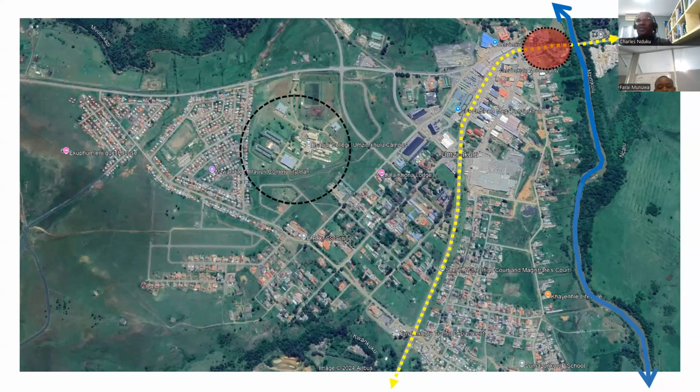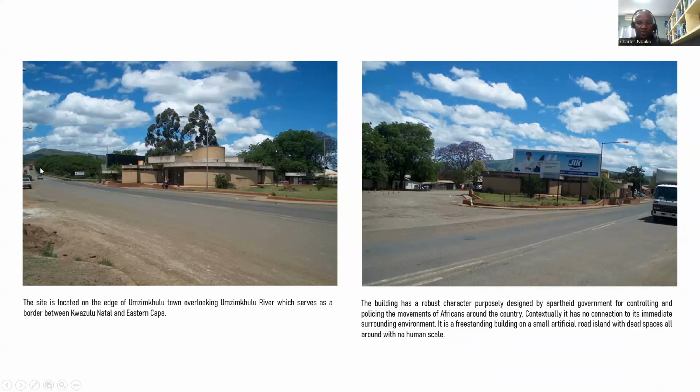As I said, this is the road, this is the building on the right, and you can see the JIK advert was just plugged in front of that building, as if somebody knew that this building doesn't have to be seen, because it used to control the movement of people from Transkei to South Africa. And that is the bridge, and you're going all the way toward the direction of Durban. So this is the site.

The red building is the existing one, and then the blue one is where the site was. It was a very narrow site, and you've got a river there, and it's only a strip of flat land, and then it steps down towards the river. It had very nice views, though the river was not the cleanest - the water was always brown, but it had a very nice view.

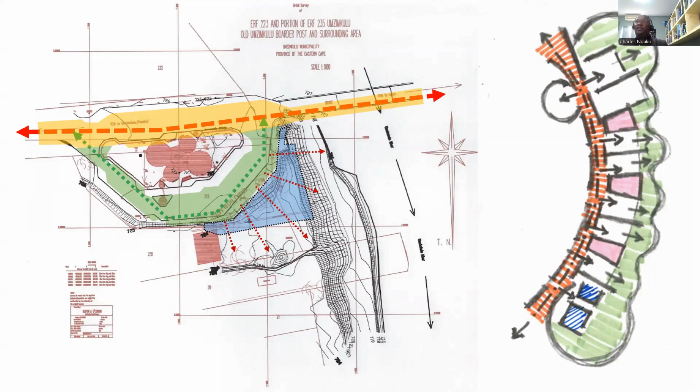They were very concerned about the communities that could be given a space like craft stalls, to do crafts themselves. So it was a popular idea to come up with buildings like that, and basically that was the building I had to produce. It was like a craft store with a restaurant, admin office, and ablutions.

So this is the building—this is the existing one, the gray one, and this is the building that I actually proposed, following the curvature of the site. My concept always follows understanding the movement of the people, so I structure everything along that movement, making it easy to create spaces on either side. At that moment, I was fascinated by curves and curvilinear buildings.

I don't know whether it was still the rural in me, but later I became less comfortable using curves, because they're very difficult to deal with. You must make sure where they meet and really know what you're doing.

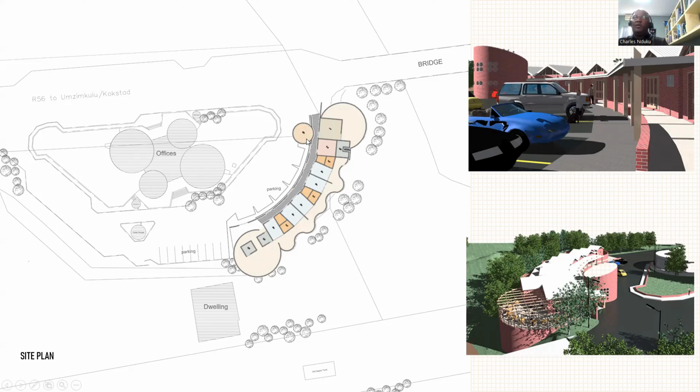The 3Ds were not much. This is one of the drawings I developed, trying to get a curve or round shape, a round building.

I had to do it manually. At that time, this was one of my first projects, so it wasn't easy trying to master the software, design and draw, because I only had Monday with me—there were only two of us.

The short elevation is this one—the front side, then the back side is the middle one, or rather the front, the middle, and the back one at the bottom.

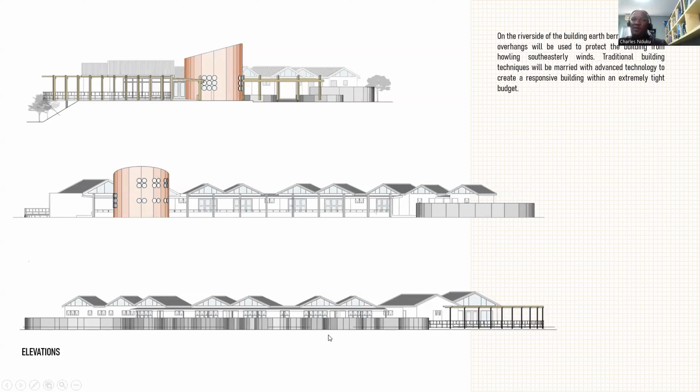So this is how the building looks. Unfortunately, with the municipality's budgeting, I was so disappointed when I had to close my clerestory windows with wooden leads. The shape and the basic idea were there—it was an open building—but I had to reduce the fenestration, the glasses, the windows, because the budget was very tight.

I think, if I'm not mistaken, it was around 3 million that we had at that time—quite a cheap building, not very expensive. And this is the old bridge.

For the deck, I actually used the old bridge there just to support it. This was supposed to be the restaurant, and when I left, Wimpy was negotiating to use that space—I don't know if Wimpy ever used it.

That's how the building looks, and I haven't seen it for a long time. That is the structure, the admin part where they stored the completed products, and that's how it looked when it was finished.

It actually blended very well with the existing buildings, because the only thing we had to do was paint—we used cementitious paint in different tones, ethnic colors. The municipality also advised whoever was advertising with that big board to remove it, so it was removed. You can see how my new building blended with the old one—as one of my first buildings, I think I didn't do that bad.

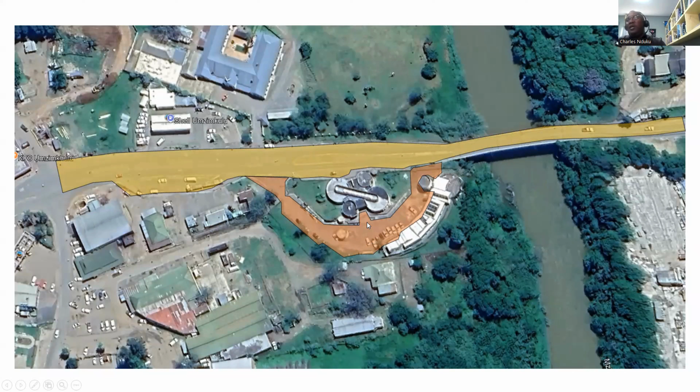It was used. You're looking at the number of cars that are parking there, so the space is eventually used now. So yeah, that is the end of my first project.

Now, coming to the Nelson Mandela Interpretative Center or Museum. The name of this building changed, I think, 3 times. So as I said, I was very fascinated.

I'm fascinated with natural light. I think natural light is actually good, it really livens the space up. I took this because I realized that a rondavel is usually dark, and if you look at the rural rondavels, they have got small windows. It's usually dark inside, but it's not that cold because of the natural materials that I used.

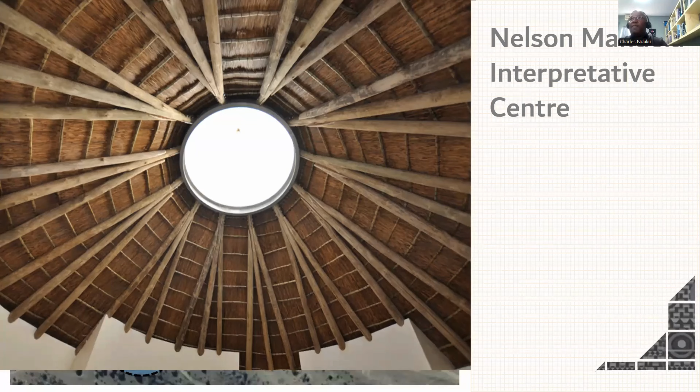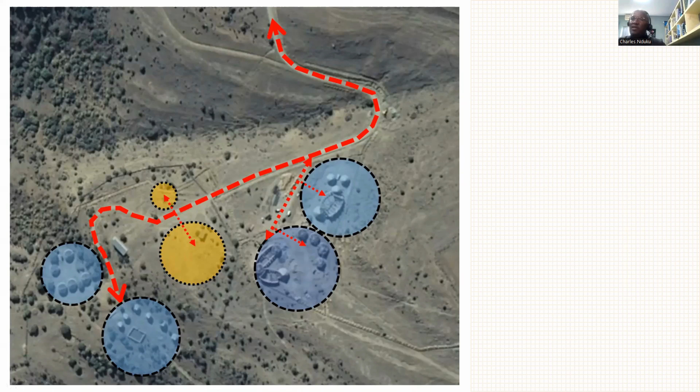And then when we got there, these 2 buildings were there already. I think they had been finished already, backpackers and a conferencing facility. I think he's building a city there, a rural town, because he also had some site development plan.

This was the site development plan there, where there's that parking, that was going to be a visitor center, and then you actually walk. Only those that could not walk would drive down to here. So this is what is existing there.

We found existing, I think it was done by DPW, a display that showed pictures of Nelson Mandela when he was still growing, or young, or a boxer. You probably have seen these pictures of him.

So we had to try and use more or less the same language. So this was the attempt. After so many attempts that I made, I thought of a first world approach.

And Mandla is one of the most difficult clients you can ever get. He said, you know what, I'm not interested in all what you're talking about, all I need is my rondavels. I need my rondavels because my homestead is made out of rondavels.

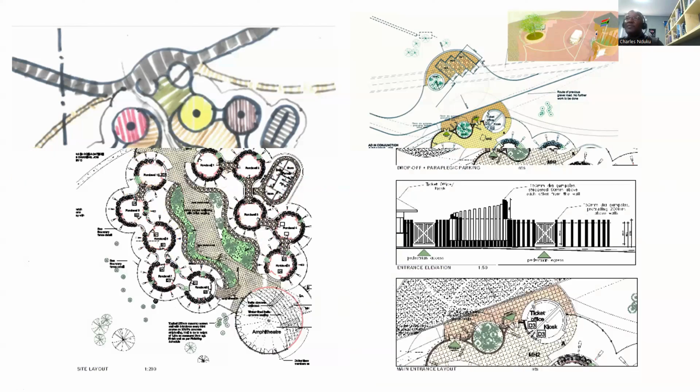So we had to have parking in front of the entrance, about 2-3 parking, so that when the tourists come, they park and then walk in. And then this was the entrance proposed.

And he envisaged this as a space where his grandfather's bust was going to be placed. He insisted that we plant these poles so that there could be creepers that will grow there, and then sort of cover or protect his bust from the weather. That was his idea.

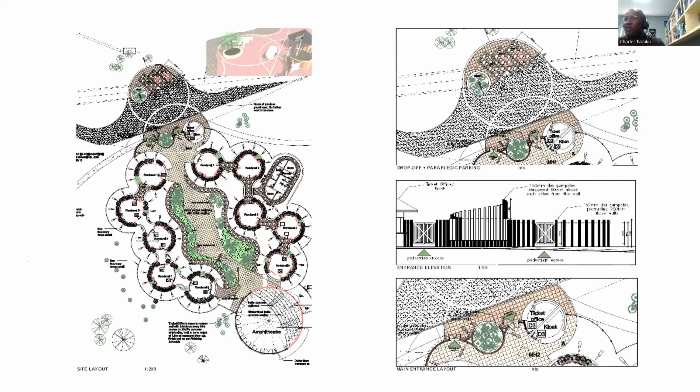Because the site was slopey, and the rondavels were up on the hill, the wind is quite heavy in rural Transkei, so we had to make sure of what we were doing. We tried to step down the building, with the main walkway and then little walkways in front of these structures on the upper side and the lower side as well.

So this is how the entrance looked like when finished. At the apex, we used polycarbonate to allow the natural light in.

At the bottom, we created a plinth. The rural rondavels, the mothers do motifs, and that part is always thicker than the other part. The upper part, to my surprise, really subscribes or fits within the classical language of a plinth and a cornice, the superstructure and all of that. I don't know whether they were aware of that in the rural areas when they were doing it. So this is how it turned out at the end of the day.

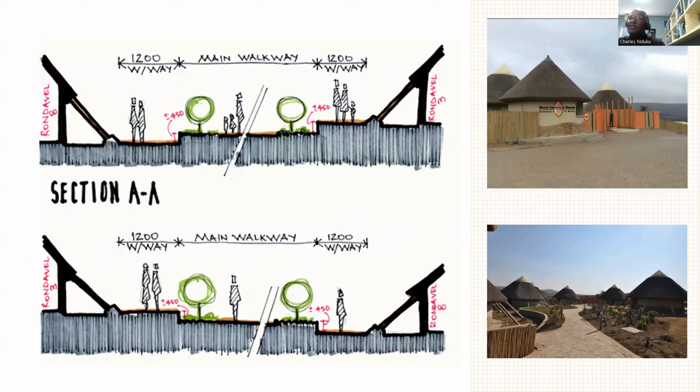It was not bad, but in the rural area we had to stick to the language that Mandla understood. So we did quite a lot of details with the polycarbonate on top to filter the natural light and create the spaces where the information is going to be stored, locked.

We thought of the channeling, the stormwater around the building, so we used no-fines concrete, so that the water that comes through falls down the thatch roof, is captured there and filtered away from the site, and some of it will actually help irrigate the greenery around.

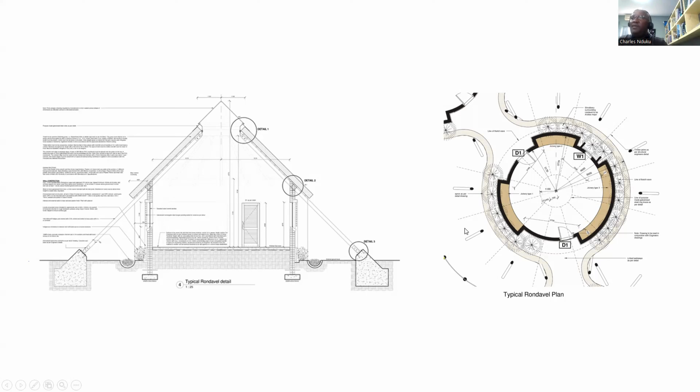It was a lot of a struggle, because we were dealing with a client who knew what he wanted. These were details for the top ring, because the weather is always a problem where you have to meet so many poles that are like 100 millimeters plus in diameter. So we created a steel ring to fix each of them before they meet at the center there.

That was an opportunity to start introducing our polycarbonate, which filtered the light very nicely. This is the amphitheater. Unfortunately, because it's such a huge structure, our engineer did not want to use poles, he used steel instead. But again, the idea of natural light is one that I always want to use.

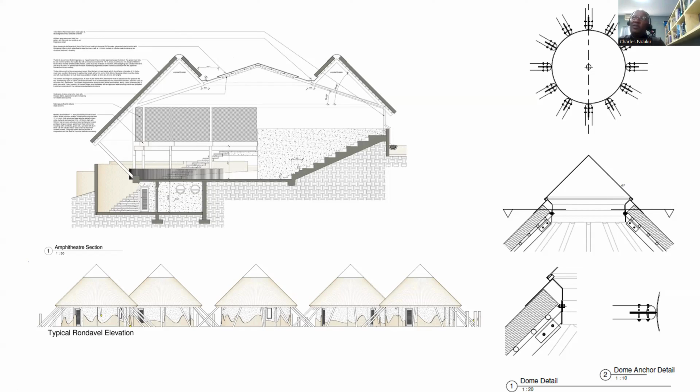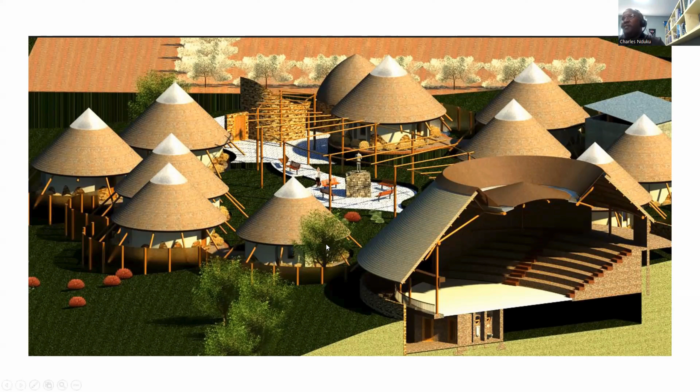We created storage underneath for water. We had water tanks there, storage, and some other goodies to be stored underneath. This is the model that we did for his approval, and he looked at it and liked it, so then we started building from this model.

So these are the rondavels, and this is the amphitheater, how we dealt with the natural light and tried to diffuse the light. That was polycarbonate.

Another polycarbonate, the same material that we've used here, because it's not that bright, it doesn't allow the sunshine, it only allows the light. So it was very successful in that way.

This is the detail that I would have loved to see using wooden poles rather than steel. But I'm not an engineer, I could not argue further, and I was still early in my career. Who was I at that time to argue with the engineer?

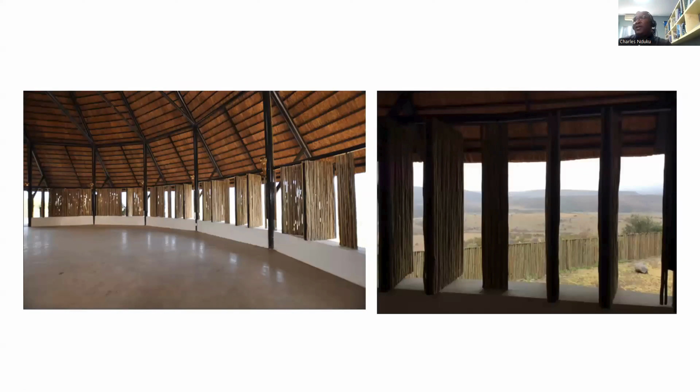Inside the amphitheater, we had these louver doors made out of flats with polycarbonate. We opened them sometimes when there's a performance, and then there's the valley you can see while you're inside there. So we attempted to actually give a rural experience. This is how it came out at the end.

And then from a distance, those big structures are the ones we found, and they're looking good. Ours is that one, and this is the village, and the homestead of Mandla is the one below. When we left, there was construction beginning on other rondavels at the bottom. I don't know what those rondavels were going to be.

And then we're moving to Ngaleni Library. Ngaleni is about 30 to 40 kilometers away from Mthatha. This is the library, we were appointed by Kucha. This was DSRAC, Department of Sports, Recreation, Arts and Culture. The site is in Lebote, in Ngaleni.

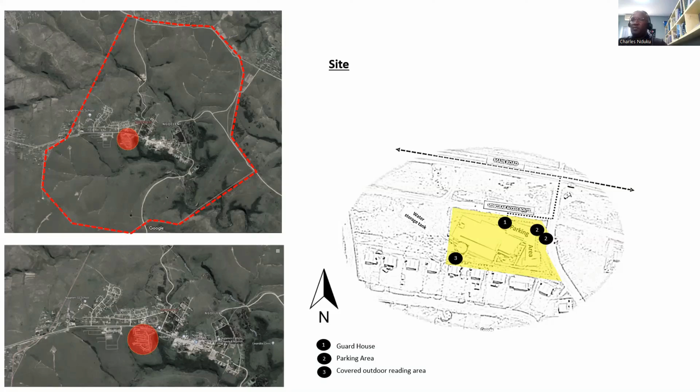As you approach the town, it's not far from here. The town is in that direction, coming from Mthatha, and there are RDP houses here. So this is the site, a very tiny site, very small. It was very difficult to fit the building. We had to tilt the building around so we could fit it, because we had some norms to actually follow.

Having ideas, I thought of a book as a concept, because in a library you need to filter natural light, but you cannot allow that light to shine directly on the books, because the books will fade, and also you must think about the heat. So I thought of a book as a concept, like an open book, with the base at the bottom, and as you open that, that is the space for the light, natural light, to come in at a higher level.

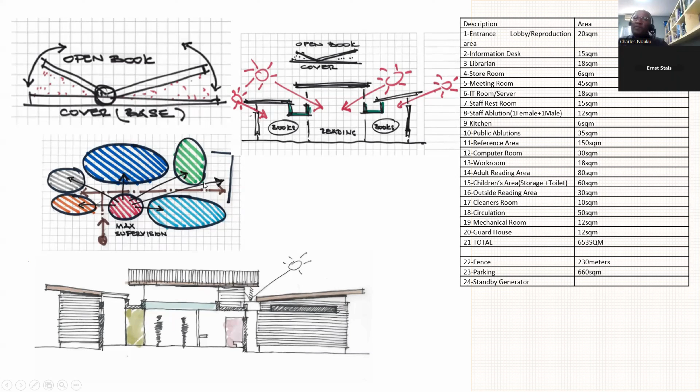This bubble diagram here is actually the main principle of the library. We had a supervisor or reception at the center, and that person must have views all around. This is the entrance, and the brown is just the circulation into the space, and it ended up with an outdoor reading area.

So this is the section, and I'm very bold when it comes to concrete gutters, but I don't make them small, I make them big, because they give opportunity and freedom to do anything. On top there, I wanted to filter in the natural light, so I lifted my windows higher so the light can come in, but indirectly. In the middle of the building is the reading space, and the reference library books are under that space, where the sunshine does not come directly onto that.

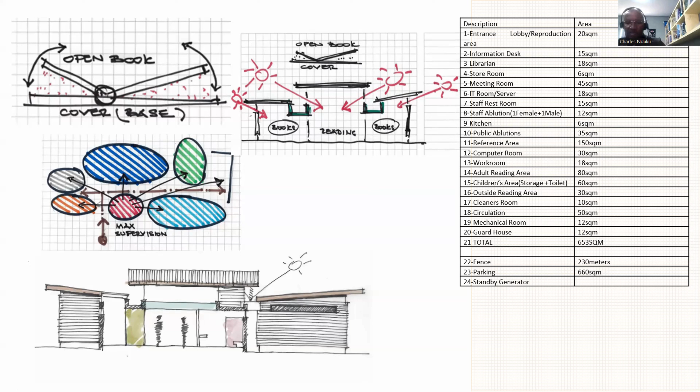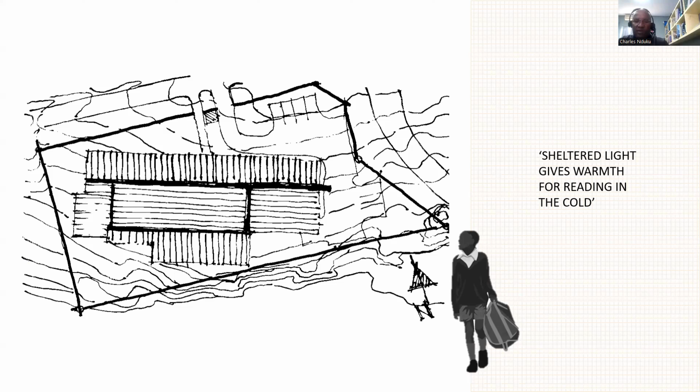So this is the section that came out of that. These are two box gutters that run into the building, actually also providing a structural element. The building is structured around those two elements. This is the layout, how it ended up on site. We had to squeeze everything in, because it's not a small building, you have to meet certain standards in a library.

So this is how the library turned out. The brownish area is the circulation, then the reading area for the adults, and the kids on that side, then the outdoor reading, the meeting space, the boardroom, and the toilets on that side, then the computers, in areas where they can use the computer for reference. These days they're using computers, not everything is in the book.

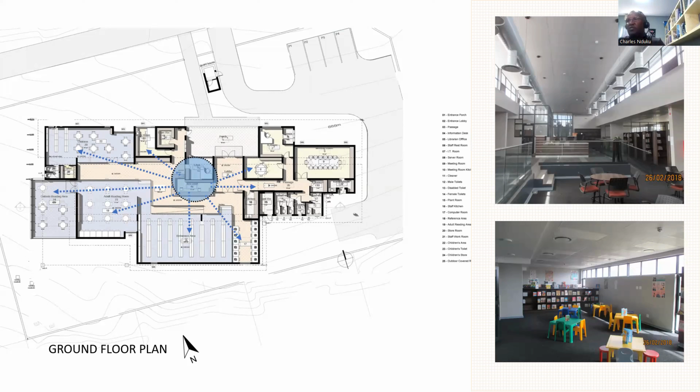So this is how it looked inside, with the light coming in. I got so disappointed here, because the idea was to come up with a building cladded with zinc or metal, knowing that municipalities and government buildings are not really well looked after. So I wanted to minimize that, but the idea was to clad the building all around.

This is how the building, I mean this is the roof. The green areas are the concrete gutters, as I said, everything flows into there, there's no issue, and you can walk there, you can sweep and go in and sweep. We've used a system that sucks the water out quickly, it's called the Geberit system, so that it doesn't flood.

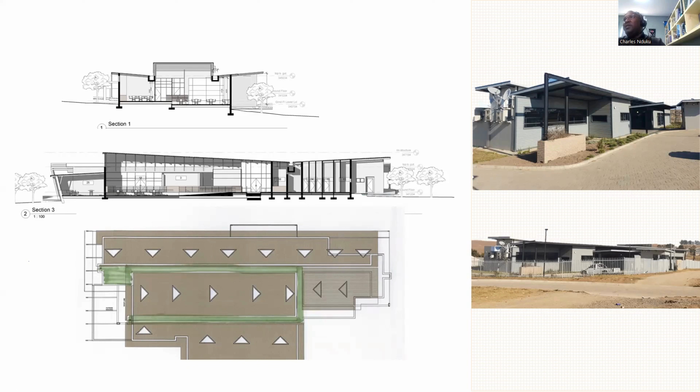So that's how the building looked like at the end, and you can see it's cladded in front only, unfortunately. The back is not cladded because they ran out of budget. It was very sad to see, and I'm still talking to them to actually clad the building at the back as well and on the side. Hopefully one day it will be cladded all around.

This is trying to show, as I said, the idea of a book that is very straight line, and then opening up, like the books, and where you open up, you allow the light in. And then this is the drone footage.

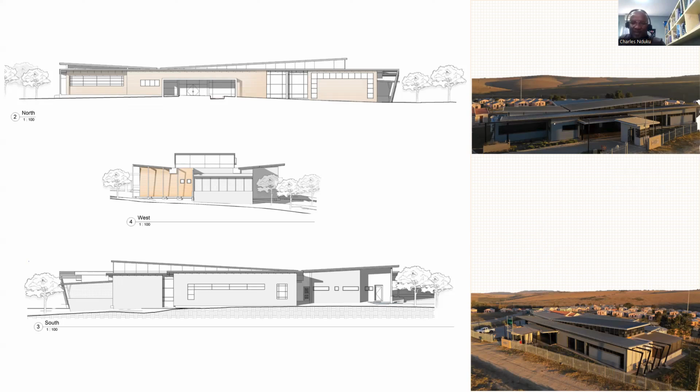We just bought a drone in the office, so we were learning. You can see that we were not that good with the drone, but it was dark, it was getting late when we got there, so this is how the pictures turned out to be. So we will learn. This is the 3D version or perspective of the library. It came close, but I wish it was all cladded around.

Then Luzerdrift Primary School in Mount Fletcher, 55 kilometers away from Maclear. It's about 20 on towards the Mount Fletcher side. So again, it's a nice village.

There's a mountain behind it, and I wished to have used the stones, but it would take 2 to 3 years to actually do that. When I suggested that to ASIDI, this is one of ASIDI's projects, they said no, it won't work. They have to finish on a certain time, and the ASIDI program is going to finish. Let's use normal material that can easily be used.

And we worked with Marty, architect in Lady Grey, and she was very fascinated with these rural rondavels, which are now cladded. When the thatch ages, what they do in the rural areas is start covering it with zinc. So we incorporated this typology into the school, and I think it came out very well. I mean, yes, it's a big structure, but at least it's broken into pieces so that it fits well into the context.

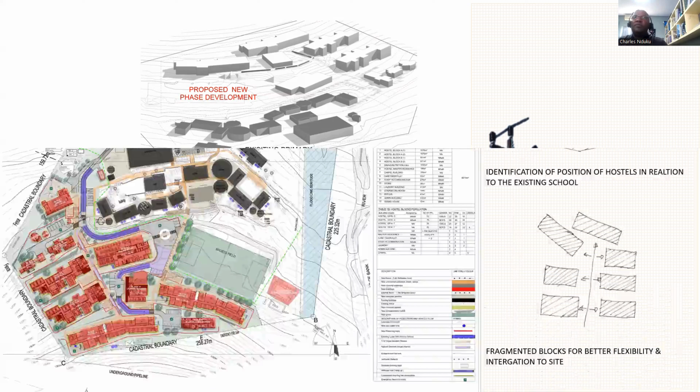So this is the site development plan. The gray area is what we built, what you saw there at the moment, again at the foot of the mountain, so we had to follow the contour. Yeah, and there's a misalignment there. My fellow architects sort of liked that misalignment, but it's fine. You know, each and every one of us have to contribute.

So the new part now, which is like your hostels, is the red buildings. My buildings are the long buildings. Her buildings are the shorter ones, and I'm doing the DNC and the laundry. We tried to separate the pedestrians from the cars, hence you have that S-shaped winding road, so the kids can just go straight, separate, and minimize contact with the cars.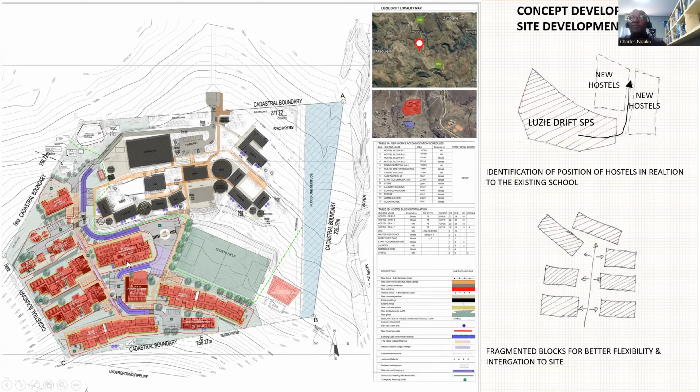So basically that is the SDP. Of course, when you start design, I start everywhere because I always think about the sunlight, the natural light. So this is looking at the context. The site is actually very steep and it's tight. There are some environmental issues. We have an environmentalist there, so that made things even worse.

I took the contour as a concept, then sliced or placed the buildings, the block, along the contour, but I had to break it so it becomes flexible. What is important is I did not want to make the buildings wider, because if the buildings are wider, you end up with high roofs. And this is a snowy area in Mount Fletcher, you have to have a minimum pitch roof of about 28 degrees. So once you have wider buildings, you're going to have too high roofs.

And then I broke this block into three places. Because I also wanted to incorporate the greenery, I took out some blocks and created green spaces in between, so those spaces can actually flow into the inside. Of course, we actually want them physically inside, but that is the detail we're still thinking about. You know, it's hostels.

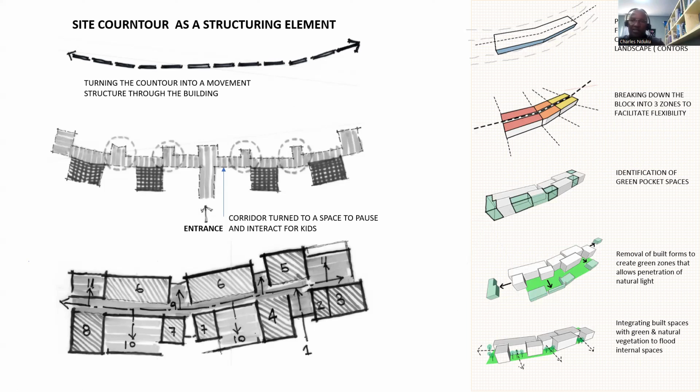It's going to host about 300 kids, primary kids. So it's a double story. Then you have the entrance point at number 1, and the main corridor or access circulation, then you have pause areas in between, and that is the area where we start breaking the building and trying to introduce the clerestory lights on the sides of those structures.

So this is the roof plan, how we now started pulling this thing apart and then introducing green spaces. And then that's where the dormitories are, with the mother sitting just to supervise them.

This is the layout. So you come through here, and this is the reception, and this side is recreational. Then we introduced another green space there that will spill over, the recreational space will spill over into that green space outside. And then these are the dormitories, spread out long.

That is why I did not want to make it wider, because it would have created high pitch roofs. So using the natural light again in the gable ends, so that the kids can really enjoy the space, and they are young, in this time of load shedding.

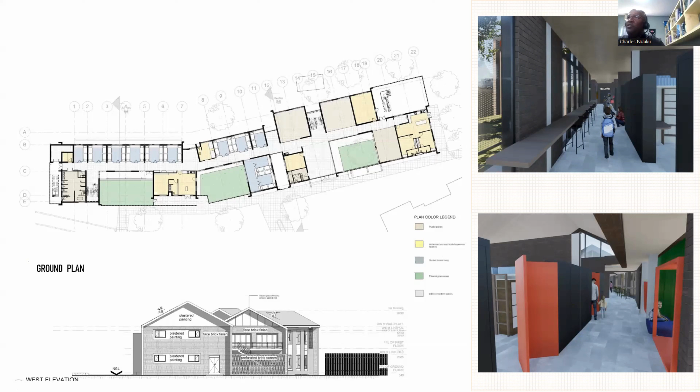I don't know whether it's going to come back again, but when we design, I think we must design for passive energy. Natural light is always good, and also very good for the young kids. This is just a normal building, nothing fancy, but on the gable ends we're introducing natural light.

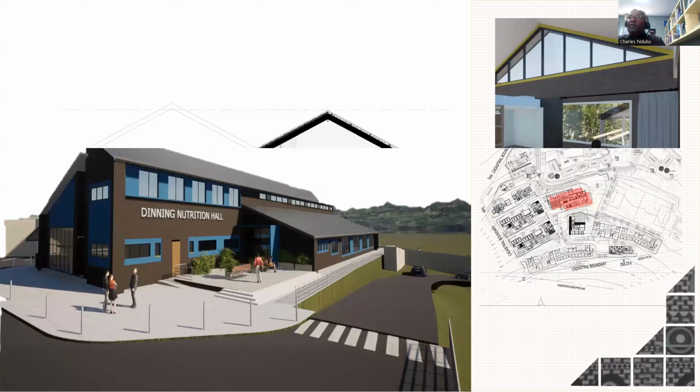Then the DNH, the dining, this is one of the buildings - if you've been involved in ASIDI schools, it's a huge building because it's wide due to the spaces you have to allow. And being in Mount Fletcher, with a minimum roof pitch of 28 degrees, you end up with a 7-meter tall roof space.

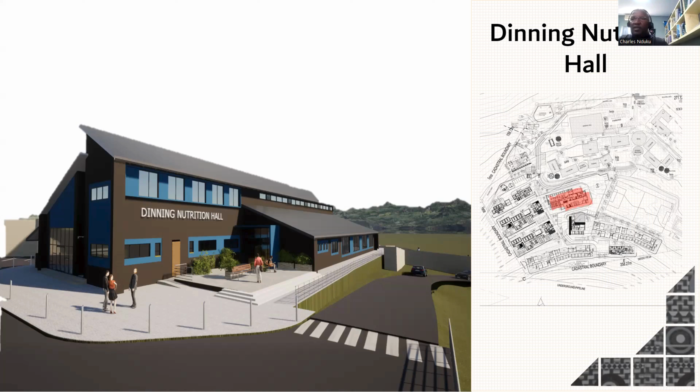Then you have to start doing something. So this is what I'm talking about. The width of the building is about 25 meters, and if you use your pitch, it's going to be 6.5 meters tall roof. So you can actually have another room there.

What we've done, we started pulling these roofs apart and introducing clerestory windows so that we can harvest the natural light. Because we are catering for 200 kids, we had an opportunity to introduce a mezzanine floor so that other kids can sit there.

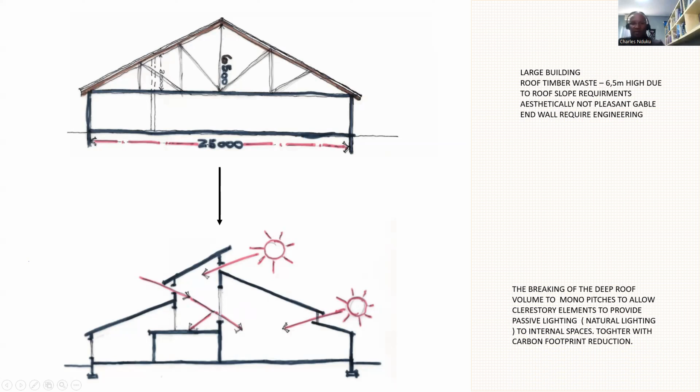So this is how the layout is. As I said, these are the dry store, the cooking area, the prep area, and the cooking area at the center. Now it has to flow, and this is the dining on the side.

Your change rooms for the staff must come from a separate entrance than the main entrance. This is a quarantine area - when they deliver food, it gets sorted out there, then comes into storage, and into the cold rooms.

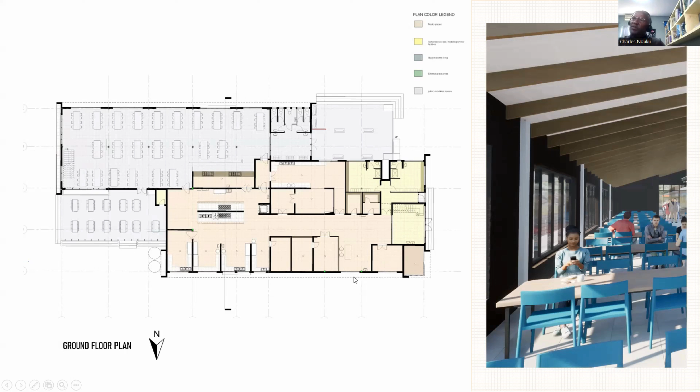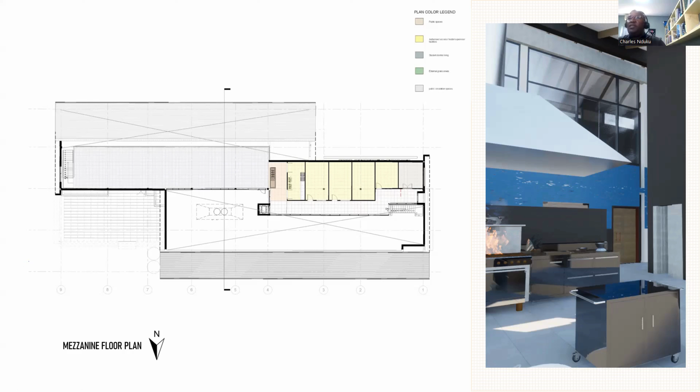Then this is the mezzanine. I think it gives us an opportunity to place offices, dietitians, and supervisors at that level. So this is how the building will look, since it's still at the design stage.

We started pulling it apart, introducing those clerestory lights and windows instead of having one big roof that is 6 meters tall.

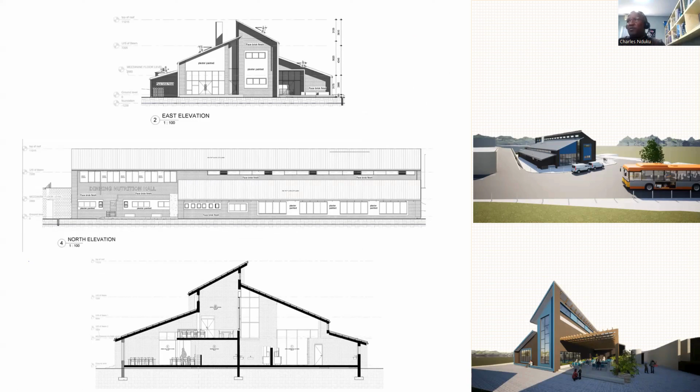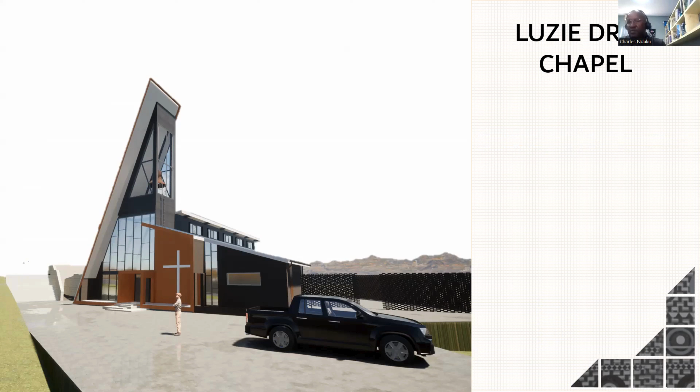We also have a chapel there, a small Lanyana chapel, not that big, for the school to engage in some religion. I think this will also be used by the community as well. It's not a big one, but it was an opportunity to use the church as a landmark, since it's the tallest building now because of the clock tower we introduced there, and also to use a lot of natural light.

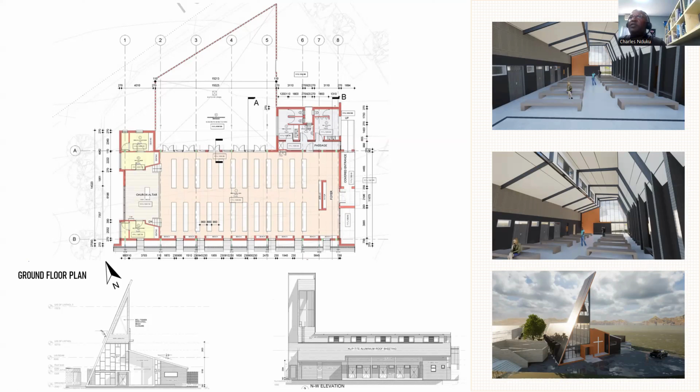Unfortunately, we have to use a concrete and steel combination - concrete frames or steel frames, or a combination of the two.

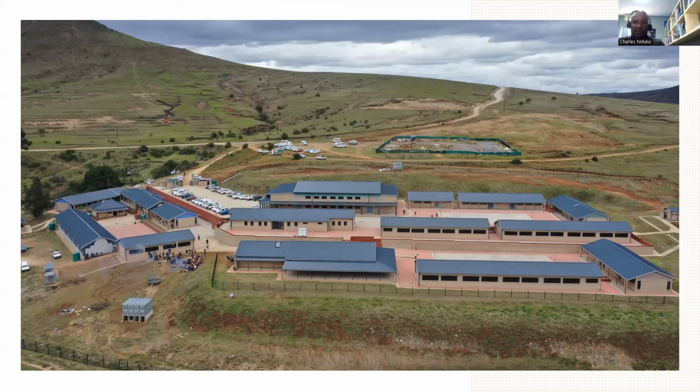This is the Dumezweni School. This school has just been opened about 3 weeks ago. Again, one of the mega schools that combines about 8 schools. It's a school located at Tsomo, Ngqamakwe - it's very rural, and it's difficult to actually go to that site.

So we combined Nqolosa, Nolusapho, Mpikwana, Sajini, Nkqubela, Sonkosi, Caba, and Dumezweni - that's where they all met, in Dumezweni. But later the name Dumezweni was changed to a new name because the school had to be neutral, renamed Lupomo, Qwili, Lubomvini. So that's what is called a mega school. The site, the school was existing.

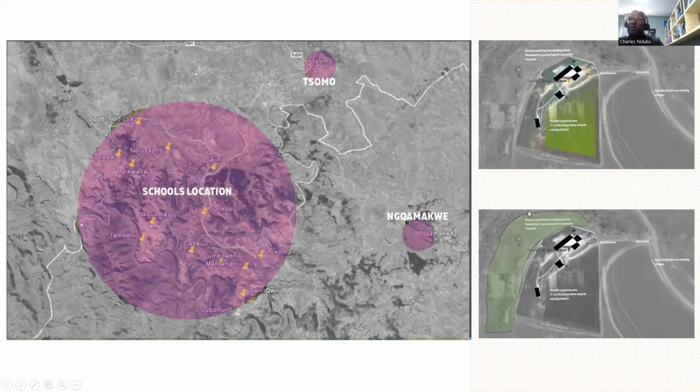It had some existing ablutions, admin, and classrooms, so we had to work with what was there. This was our first attempt - this is the SDP that was approved, and we had the hall right there, because again we were following the site contours, and then you enter there.

There's a guard house as you come in, you park there. This is the admin in the middle, and then this is the grade R, because grade R must come in and go without mixing with the rest of the school, since these are young children, so they have to be there at the entrance, so when the moms come to collect their kids there's no interaction with the elder kids.

So the admin was strategically positioned there to oversee everything. This is the DNC, behind it, and then the classrooms. Because the site is tight, we use each and every opportunity, using courtyards to provide assembly areas and netball courts. So those are the spaces that we use.

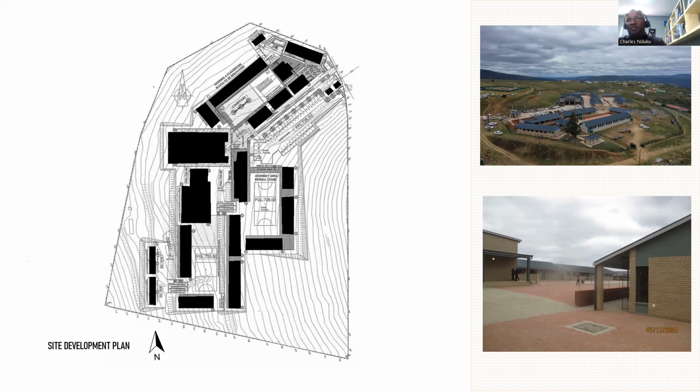But unfortunately, we had a problem with the school. The neighbor at the bottom is so difficult. He complained about the toilets, that they're going to create problems for him, and said we must move those toilets. So we ended up with this - we had to change the design now, and these toilets moved to the back.

This is the layout, not very different from that one. We moved the hall, the school hall, from where the amphitheater is, and positioned it there so that it was still accessible from the public without the public entering into private spaces of the school. The admin was still there in front of everything.

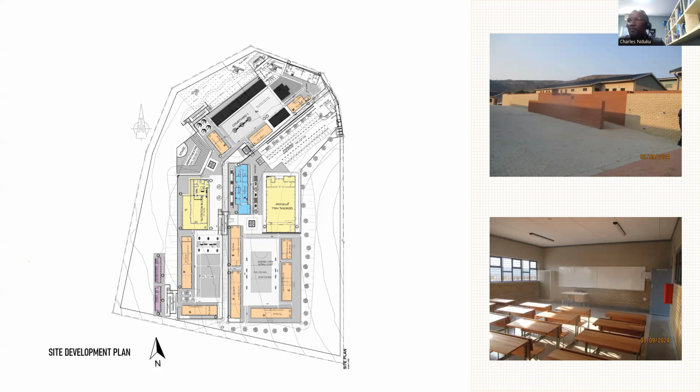So it's in a public, semi-public space. People are not invited into the schools, but these schools are actually used by the community, particularly the halls, so they have to be positioned in a public space so they can access it easily.

This is how the school looked like 3 weeks ago. The opening was there - the minister, Mr. Gade, was there opening the school. It was a big occasion. We ate a lot of meat.

I think there are farms around. Yeah, so the farmers donated 2 buffaloes. 2 buffaloes were slaughtered there, and it was enjoyable. It was a nice day.

So that's how this is at the bottom, and on top there is where the hostels will go. Right now the province and the national department, DBE, are still deciding who's going to be responsible, the province or the national. But the site has been chosen - that area where they've parked that car is going to be a sports field for now, and then the hostels will be developed there.

Below here, there's a homestead. That green roofed homestead is owned by the gentleman who is giving us a hard time now, because we had to move the toilets to the back. Now he claims that he was driving around the site, and that where we've positioned those toilets is on his road. So now we have to build a new road for him. It's difficult to deal with them.

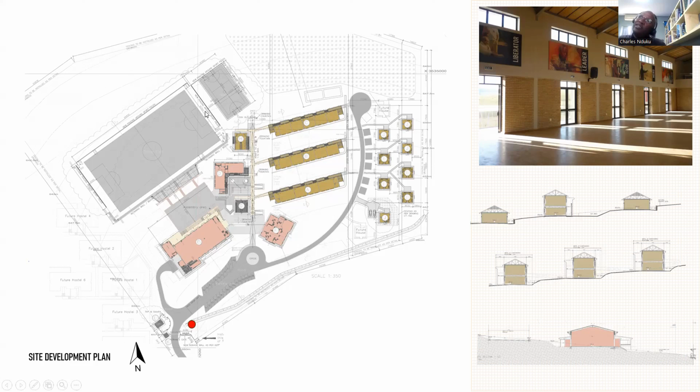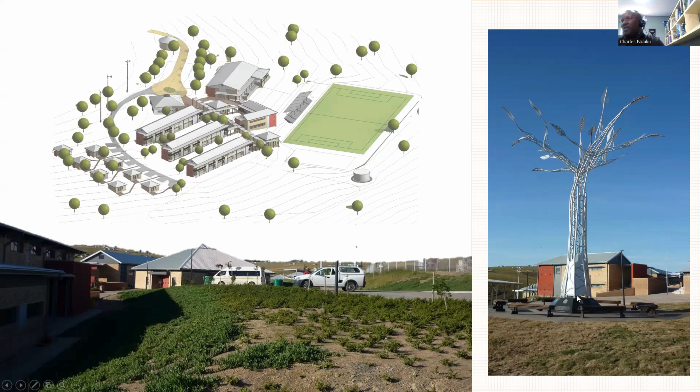So this was just a 3D model to develop after we had crystallized the idea and the concept, and then we developed these 3Ds, and this is how it looks in reality. We've got a Freedom Tree, which was planted there by Mandla Mandela, and there's a bust of his grandfather there at the moment.

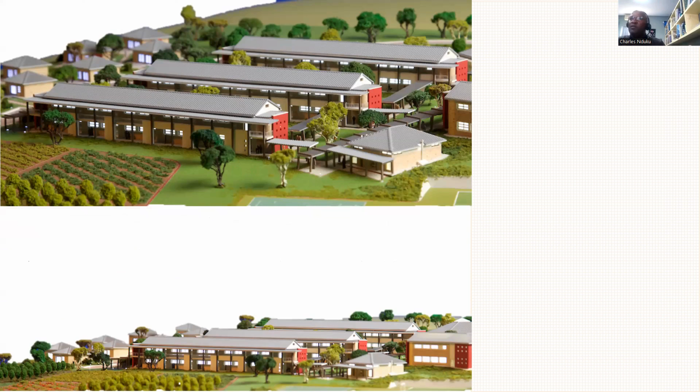So this is the model. We went to a model-making place because we had to show Siemens - the big guys abroad flew in - and we had to show them how this building is going to look like physically. And of course, after we've done those models...

So we also incorporated some farming. I don't know whether the farming is happening at the moment, but as I said, on your left there, these are teacher quarters accommodation. They stay there because Mandla told them that he wants them to stay there so that they can focus on kids instead of rushing for transport and wasting too much time traveling rather than teaching the kids. Again, the site is very difficult, so we had to navigate lots of ramps on the side.

This is Cofimvaba, I think, if I'm not mistaken, my last one. We did the school in Cofimvaba. It's right at the entrance of Cofimvaba, on your left when you're going towards Queenstown, coming from Mthatha. So this is the Cofimvaba area. This is Komani, which is Queenstown, and Mthatha is just in between those two areas. You've got Idutywa, you've got Butterworth, you've got East London. It's right there in the middle of the bundus - a rural town again.

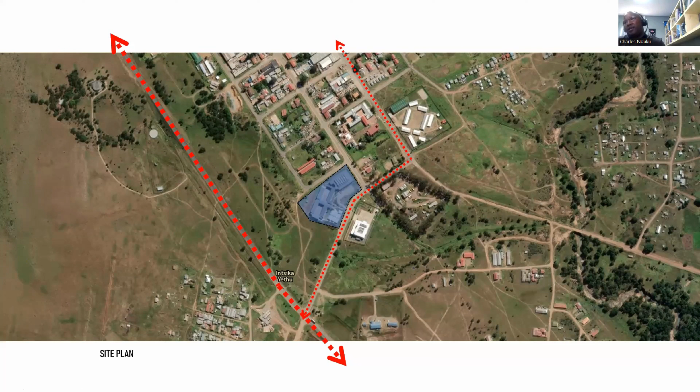So this is the site, as I said, the municipality going towards Mthatha and then Queenstown, right at the entrance of the town. There's an opportunity to really trigger or energize that stretch of the road as you come into the school, and it becomes a gateway into the town. So the building on the right here was sponsored by CSIR - I think it's a science school.

So again, looking at the contours and also the shape of the site - tight, very tight - again trying to fit everything, trying to introduce some greenery as well. Unfortunately our courtyards cannot be green because they are used for kids to play, either netball or whatever sport they can play. And then we had to put the parking there again.

This is the hall - it's more like a multi-purpose hall. Sport can be played there. It was a big fight that I had to put up, because I was told that I must design a normal hall, and when I asked them what a conventional hall is, what description can you give me, they said a smaller hall. I said no, that is not conventional - we must design a hall that will be usable and functional for the school, because we were designing for 770 kids, which after the school is usually finished, grows, because all the kids in the rural areas want to go to a new school.

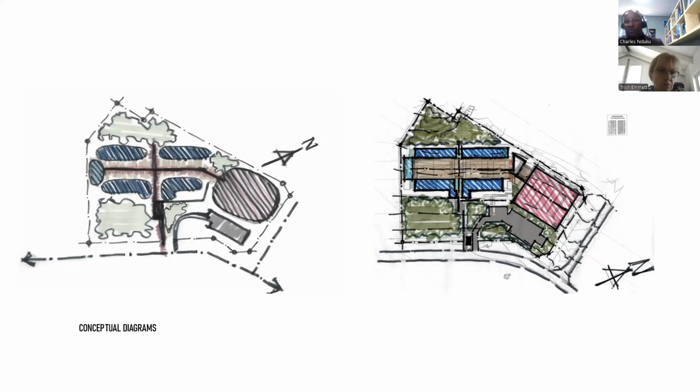So this is the main courtyard. Everything is designed around the courtyard, and that is the ramp. We had to provide a ramp so that it's accessible to disabled people from the ground to the first floor. So this is the layout - this is the admin, and these are the special classrooms, your science, your computer labs, and then ablutions, just the toilets, with storerooms and HODs in the corners there, and again the sports courtyard - we use the courtyard for sporting.

And then this is a big win for the area, because the hall turns out to be the meeting place for the whole Amatola region now. When there's a workshop, they meet in that hall, and I really forced that situation. This hall is hired by the community for weddings, churches on Sunday - everything. So the school is now making money because of this infrastructure that is put up there.

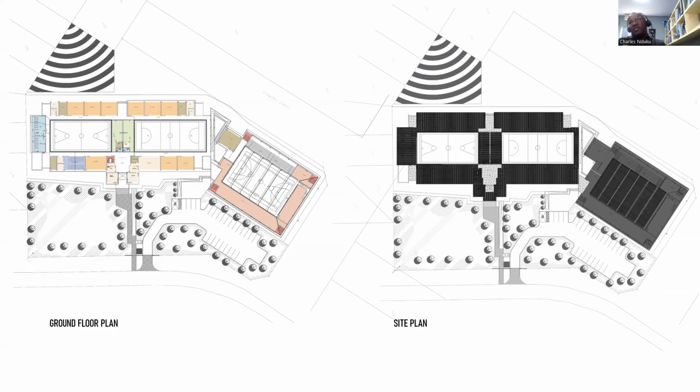I must say, I had problems with the engineer here who was not qualified as an engineer, and we ended up firing that engineer because he was not doing his job.

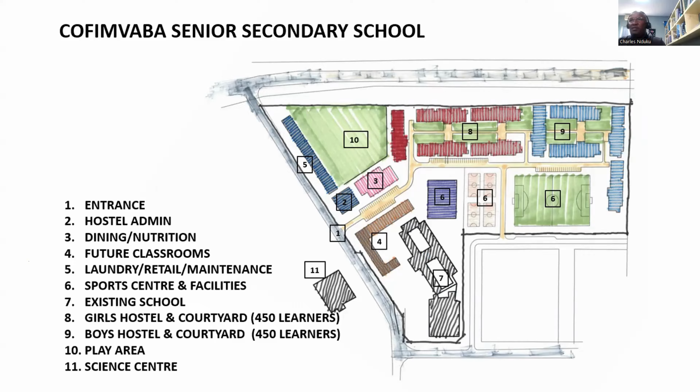It's a parkade with concrete only - we're not even allowed to introduce the steel facade, those facades that can hide the concrete. So we were not allowed.

I actually enjoyed this project. The engineering part of it was also good.

It's actually filled now, full with containers. I wanted to go and take pictures when it's in full operation, but didn't have time.

I'm just going to run through the project because I realize that I've got so many projects that I need to talk about, but I won't bore you for another week.

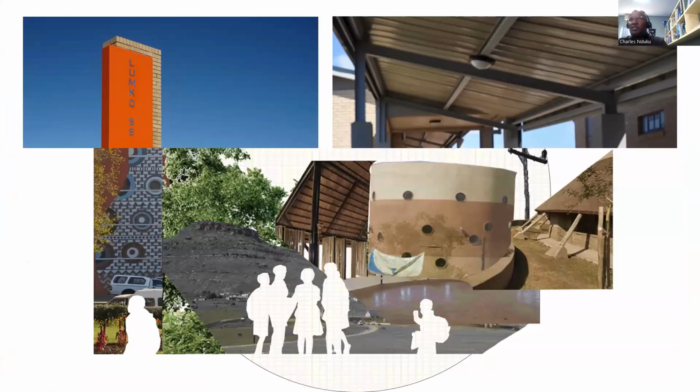Yeah, this is the end. That's me so far. Thank you very much for having me and for making me think and look back at what I've done. I think I'm going to take it upon myself to start documenting what I've done. Thank you very much.

Charles, thank you so much. I think as architects, we sometimes don't realize how much we've been through or gone through until we actually have to start looking at putting it together. Thank you so much for informing us and just sharing your journey.

I see you work a lot in schools. Yes. And I know that schools generally - I've done a few myself - have their standard things and all that, but they are all very unique and different. What would you say you've learned in providing infrastructure for schools for the different environments that you've been working on?

I think what is important is to understand - I remember our first schools, I must have done more than 200 schools, starting from the small ones. These are just the big ones that I'm showing you.

What I've noticed is that when there are so-called PWD public works specifications that you have to use, I mean the materials specified - I know public works insists it's a neutral specification, but it's not really that neutral. The use of fiber cement barge boards, those L-shaped ones, means that when you come back after handing over the school, after 3 months, the budget is already broken and blown away.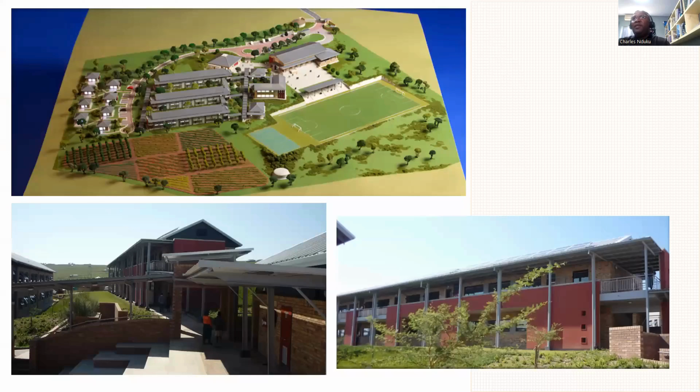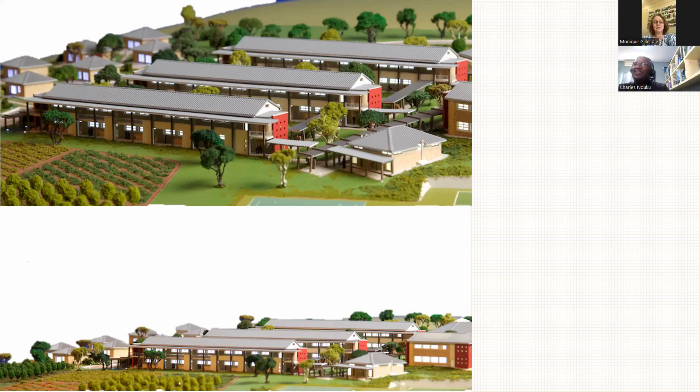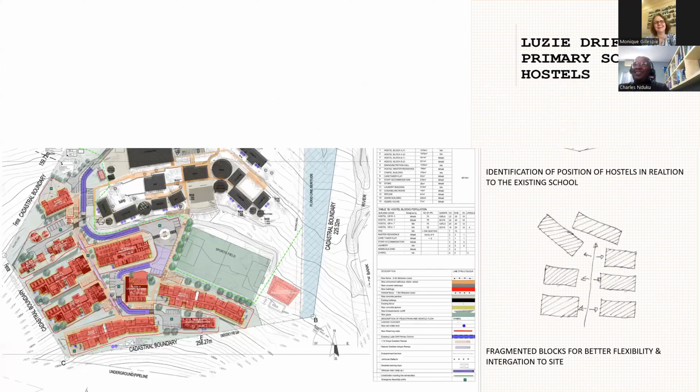Yes, definitely. So your school near Mount Fletcher? Yes, it's one of those serendipitous moments when you showed that, because I know that school. My husband, who's been married to an architect for over 30 years, is very drilled that when the wife screeches stop, he must come to a halt, I hop out and start taking photos. So that's when we went up to Naude's Nek, Mount Fletcher. I passed as we were driving, and I know this area well because we often go this route, and I spotted these buildings in the distance, and there was a screech of stop, and we stopped, and I was out there with my camera zooming in as much as I could. I was so thrilled to see a development of that caliber in that region that desperately needs it. So well done. No, thank you very much, Monique. Thank you very much.

I was just going to say, what I've noticed is there is a high demand for hostel accommodation. I think the current MEC of Education, Mr. Gade in Eastern Cape, is really committed to improving the results.

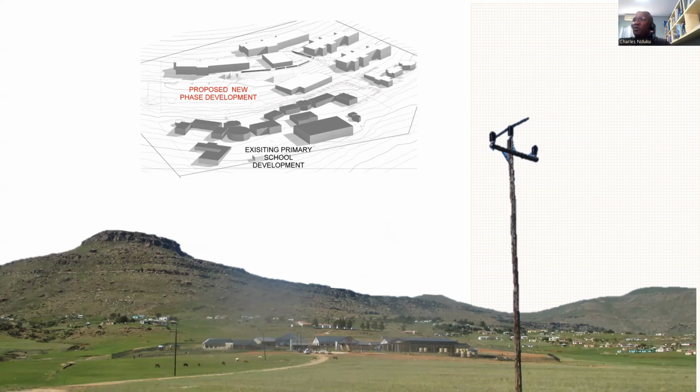Whenever he goes and opens a school, he talks about the curriculum and how the infrastructure can support the curriculum. At the moment, there is a disjuncture between the curriculum and infrastructure, because those sitting at public works - I'm not taking a swipe at public works, because there are a few individuals there who really implore us to earn our fees by design.

There are those who say use a standard drawing, and I don't use a standard drawing. I use it as a guide, but I look at the site, assess it, and respond to the site. Sometimes I'm surprised when the facility is finished and how the space fills the outdoor, because I'm an outdoor person, kind of - I'm not an indoor person.

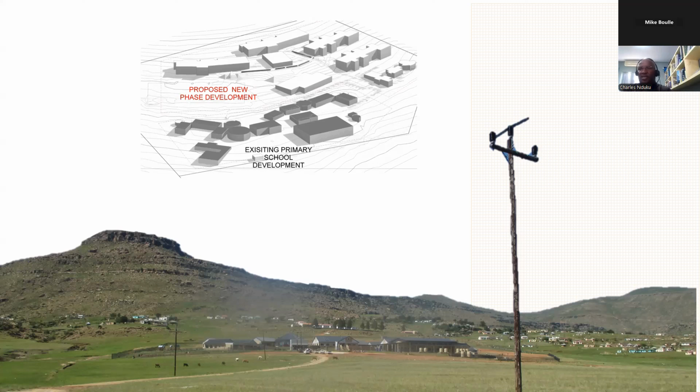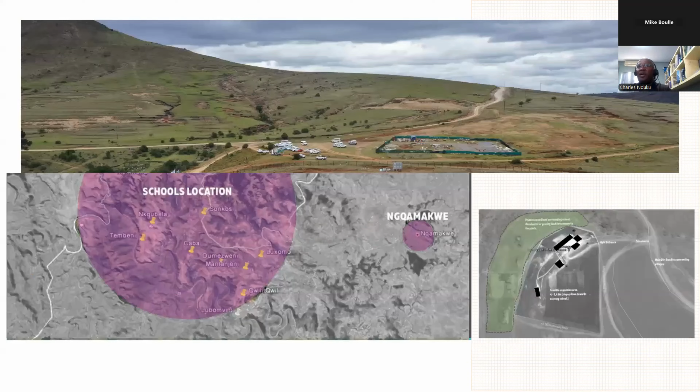Eastern Cape is led by quantity surveyors - there's more quantity surveyors in the Department of Public Works. Once you come up with an unusual design and they say this is going to be expensive, they don't even try to understand. I remember the Lumko school, where we got challenged by the department to say we must use the so-called conventional roofs.

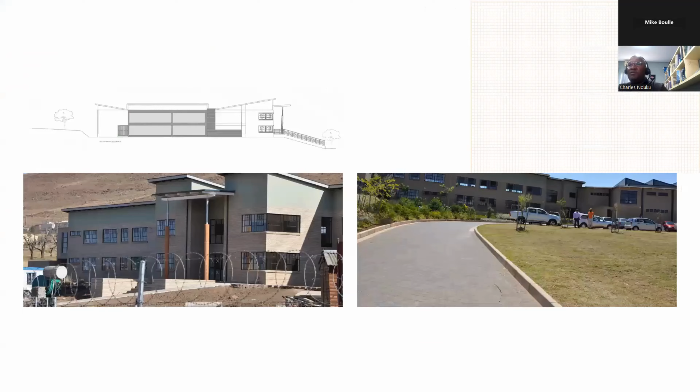I asked, what is a conventional roof - your double pitch, or gable, and the gable end is even better, but the hip roof, yeah. So when we did this roof, it's a mono pitch, and we were trying to bring natural light at that level and set the building back so we could filter the light to the ground floor, because it's easy to do that with the first floor, but not the ground floor. Then we were taken to task, saying this roof is going to be - I'm not a quantity surveyor, but a mono pitch roof - how can a mono pitch roof be more expensive than a hipped roof?

Also, in terms of safety, the seamlessness of the mono pitch versus the seams we have to introduce in hip roofs - that's not good for the future of the school in terms of maintenance.

Within no time, those seams are a weakness area for roof leaks and stuff like that. So what I'm saying is, we have that challenge that we have to subject ourselves to the approval by other architects, and sometimes they get so too much involved in our designs and then end up reducing your design, because you've been fighting, but at the same time, now the time is coming to an end.